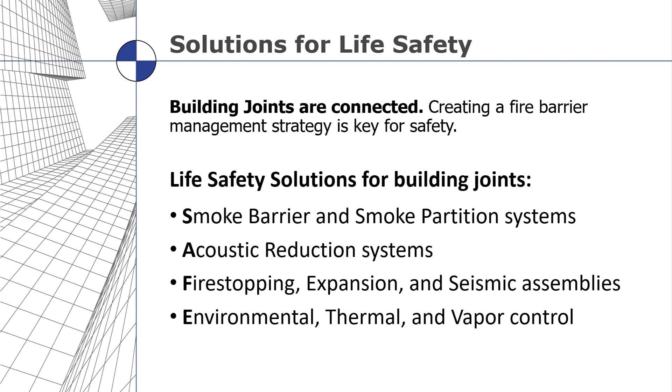Building joints are connected. They create a fire barrier management strategy, and that is key for life safety. So we're going to talk pretty in depth about smoke barriers and smoke partitions, which are a bit different from each other. Acoustic reduction for the transfer of sound from inside a structure and also from outside a structure to the inside. Fire stopping, expansion and seismic assemblies, and then environmental areas like thermal and vapor control.

Contiguous joint and gap barriers happen in all kinds of structures. Buildings of many types are meant to protect us as occupants. They also provide functionality, right? We need to mitigate the harmful things while allowing the comforts and services that these buildings are designed for. All types of buildings happen to have these different kinds of opportunities in them.

Schools, offices, the building on the top left there is Devon Energy Buildings. It's a 60-story building in Oklahoma. There's a vertical seal on the exterior of that structure where there's an expansion joint. And then manufacturing facilities and lots of data centers and things like that.

Warehousing where there's distribution, entertainment facilities, football stadiums, arenas, and civic centers. Transportation, so parking garages or airports. In the top right picture there is a design schematic of what is generally referred to as a Texas wrap, where a parking garage is stored inside a perimeter structure that is made for residential and commercial use. Housing, multifamily housing, dining, restaurants, all types, and then hospitals.

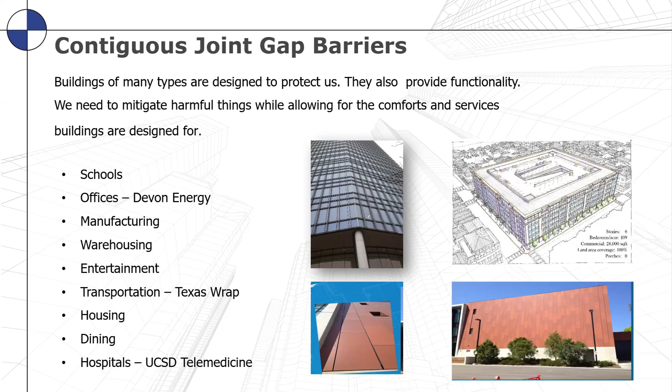The bottom two pictures are of the UC San Diego telemedicine building that has expansion joints all the way around. The right-hand side is a big picture of the elevation of the structure, and the left-hand picture shows where the expansion joint is located. It's pretty well hidden behind the structure, but that's where all the seismic relief happens. So those are just examples of the many types of buildings that we'll be addressing.

Linear joints are designed to allow movement for thermal expansion and contraction, seismic movement, structural loads, and wind sway. Hurricanes move buildings, earthquakes move buildings, hot and cold temperature moves buildings. And when they move, you have to put joints in there to allow for all these different elements that are happening and putting pressure on your structure.

And so when you have an opening in one of those, you need to make sure you have contained that by good measures of smoke control, acoustic transmission, fire resistance, and all the different environmental concerns.

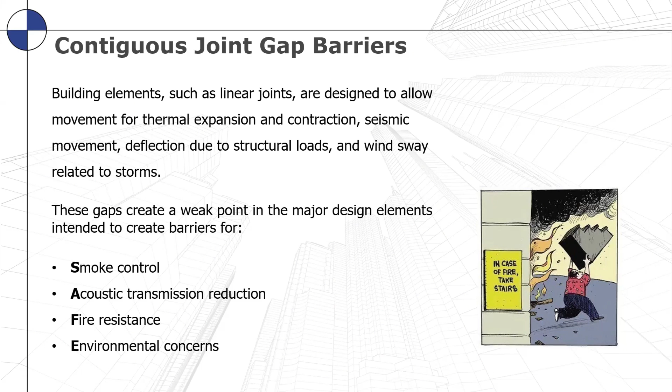Major design elements include fire-rated floors made of concrete or wood, walls made of gypsum or block. There's roofing materials, exterior cladding materials. There are all different types of materials that come together to create an architectural structure.

And so the joints happen in those routinely and are identified by codes and standards as head and bottom of walls. So the top and bottom of where a gypsum or block wall would meet the next floor up above it or down below it. Curtain walls, which are exterior structures usually on high-rise structures. Expansion, seismic, wind, and thermal control movement gaps happen all throughout the structure.

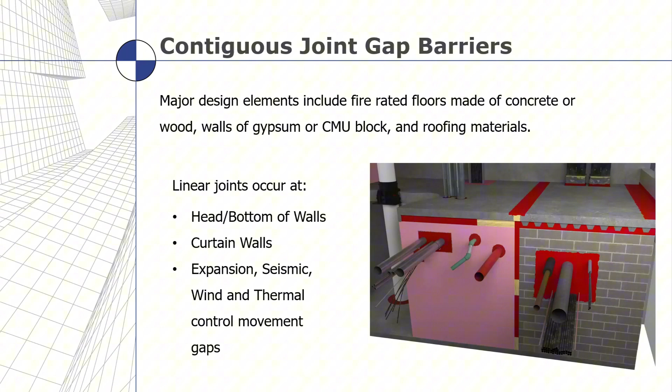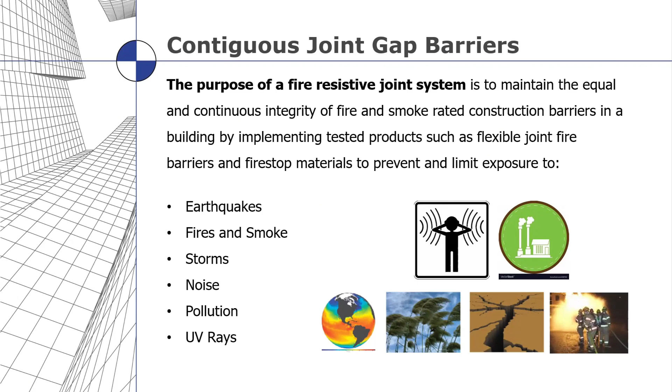So a fire-resistive joint system is required to maintain a continuous integrity of fire and smoke construction barriers in a building by implementing tested products. So that's a key component. You need to have tested products that meet the kinds of criteria that are needed, and you need to be able to incorporate the flexibility, and all of those things need to be tested so that they can reduce the impacts of earthquakes, fires, storms, noise pollution, things of that nature, UV rays, harmful elements on the structure.

So containment, compartmentation is a very, very key concept in management of joint systems. When you design a structure as an architect or engineer, you compartmentalize the structure internally so that you have a way of containing the spread of any kind of issue such as fire or smoke, we'll use in this particular application. And the building on the left is the MGM Grand Hotel Casino in Las Vegas.

It was early 1980s. That structure had some gaps in it that allowed a lot of smoke to migrate throughout the structure. The fire was down at the bottom, but the smoke is what made its way through the structure, and you can see that it just went through the entire structure as it went up. That's been a pretty heavily studied project over the years, but a good contrast to that is a building to the right. This is a chemical manufacturing facility in Yorkshire, England.

And so what you can see is there's a few levels there. There's at least four stories of some glass filled windows there. And you can see up towards the third level, there was a fire that took place, but that fire did not spread beyond that area. What you're looking at right there is a containment. So that sort of L shape that you're seeing is really a big rectangular box that's got firewalls all the way around it.

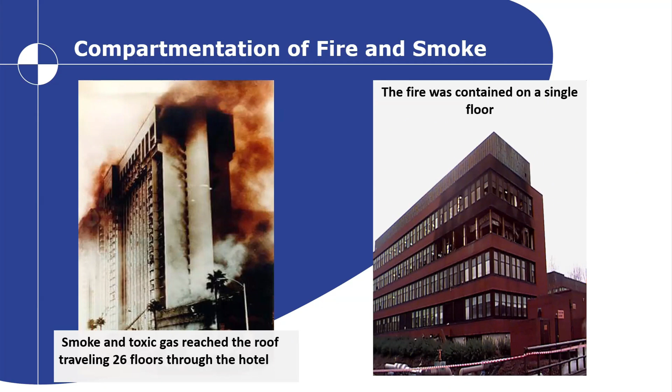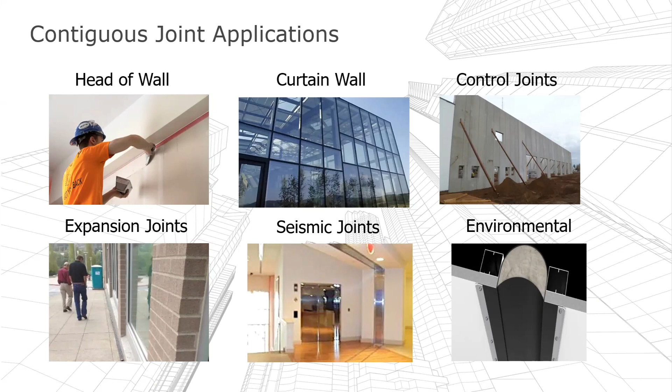So the joints that happen in that compartmentalized area consist of head of wall applications, curtain wall applications, control joints, expansion joints, seismic joints, and environmental protective joints, which would be openings in the exterior of a structure that are designed for movement. And so we'll look at all these in detail as we move through here.

So again, smoke is one of the main items that are very important to be able to contain in a structure. And so lots of surveys have been taking place. This one is John Hall Jr. from the National Fire Protection Association. He did a lot of studies, and he noticed that 75% of casualties that happen in a fire are caused by smoke inhalation. It's not by heat. It's not by structural collapse. It's not by the flames. It's smoke inhalation. So how does that get to people so quickly?

Well, if you think about it, smoke not only gets in your lungs, but it also stops your visibility. And so one of the things that he noticed in there was the speed that smoke travels. Smoke has some speed to it, it's not just lingering around. When you have it in a contained structure, you have different building elements, and the two elements may be side by side, and they have equalized pressure in the building, whether that's done through an HVAC system or whatever.

The volume of air is in equilibrium. When you start introducing a new element in there, it starts taking up volume. And while smoke doesn't seem like it takes up a lot of volume, it really does. And as smoke fills the volume, the pressure changes, and then the smoke wants to move through whatever it can.

So if there's an opening like an expansion joint or a head of wall joint or any kind of gap in the structure, it wants to go through that to the other side to get equalized pressure again. And so it does that. How does it do it? Well, it moves through any opening that it can find, and then how fast does it move? 120 to 420 feet per minute.

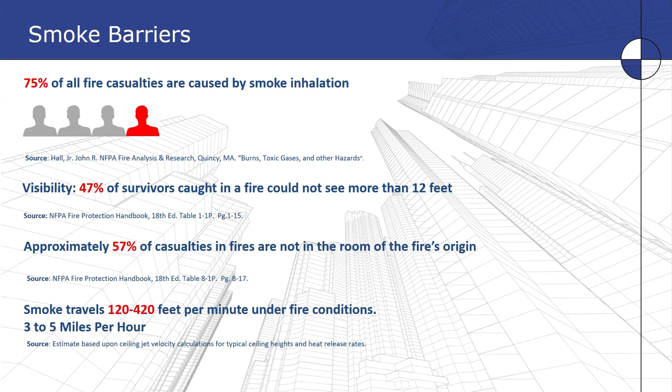But if you pile lots of people in a corridor that's meant for egress or a stairwell, that becomes impractical. And so smoke overtakes a lot of folks. So we want to contain smoke. That's very, very important. So there's a difference in the smoke control systems in a structure. There are smoke barriers and smoke partitions. And the short version is a smoke partition is designed to keep smoke inside a contained area.

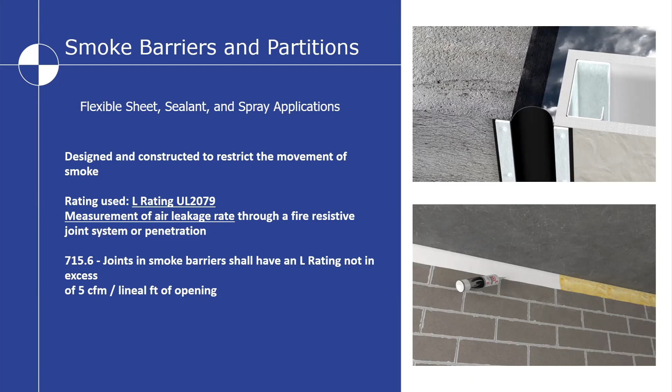A smoke barrier is designed to keep smoke and fire. That word barrier is the key difference. When the word barrier is in there, this construction material is not only meant to stop smoke, but it's also meant to stop heat and flames and things of that nature. And so they are developed in the codes and standards a bit differently.

A smoke barrier through the International Building Code, IBC section 709, addresses a standard, which is a test standard, UL 2079, and there's other standards that are similar. It carries a minimum 1 hour rating on it for fire as well as smoke.

And so IBC 715.6 identifies a section within that UL 2079 standard that is called an L rating, which stands for air leakage, which is also the identifier for smoke. And so it must be less than 5 cubic feet per minute per linear foot. A smoke partition does not require the fire segment or the L rating segment.

It requires a different standard, which is IBC 710, which refers to ASTM E90 as the standard, and it really is just a containment of smoke. So it doesn't have to deal with the fire protective aspects. And so IBC 710.7: joints shall be filled with an approved material to limit the free passage of smoke. So it doesn't have to have quite the criteria of fire and that sort of thing.

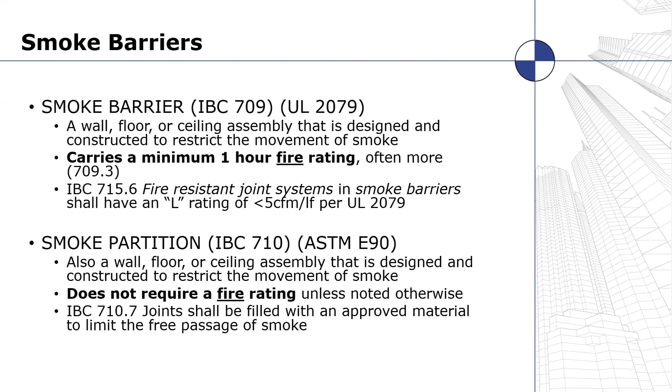One of the areas where you will find joints commonly are at the head of wall and bottom of wall. And so there are different kinds of materials that are used. Some are sealants, some are foam materials, some are tapes. There's a bunch of different kinds of products that can be used in there. And so you have smoke criteria. You also have acoustic barriers. So we're going to move to the next level from smoke to an acoustic barrier, where you have to seal that to keep sound from transferring from one area to the other.

And so just think about this. Say in a hotel, right? You don't want sound transferring from room to room, from elevators or restaurants or cooking areas, transferring into rooms or different areas. Schools, right? You don't want one classroom hearing what the other classroom's talking about so much. You just don't want that kind of sound.

But there are also some health areas that are important to this, and that is HIPAA violations in medical facilities. So you do not want to have two rooms next to each other where one patient in one room can hear the doctor talking to the other patient in the other room, or any type of diagnosis or anything like that. So it's very, very important that you control the passage of sound through structures.

And so there are standards in place. The two standards that are mostly used: the STC rating, which is a sound transmission class rating. It is a measure of the number of decibel drops that you would have with any particular product. And so there's a requirement that says that as a minimum, in most cases, you would want to have from an interior structure, room to room, a decibel drop of 50 decibels from one to the other.

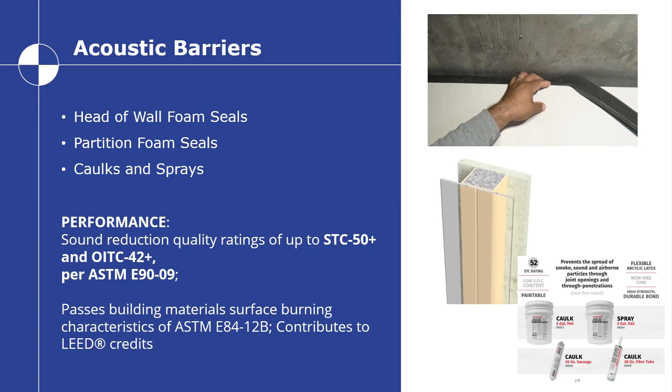So this is an example of the STC ratings, the sound transmission classes. And so what are acceptable levels? If you have a decibel level, when you get up around that 50 mark, you start being able to hear some sounds. They're very loud sounds. At 60, you can faintly hear shouting or hammering. 70 plus would be virtually no sound transmission at all. So if you hit that 50-60 class with your ability to impede sound transfer, then you can take care of some pretty loud noises. Products that are less than that, obviously, too much sound comes through at an unacceptable level.

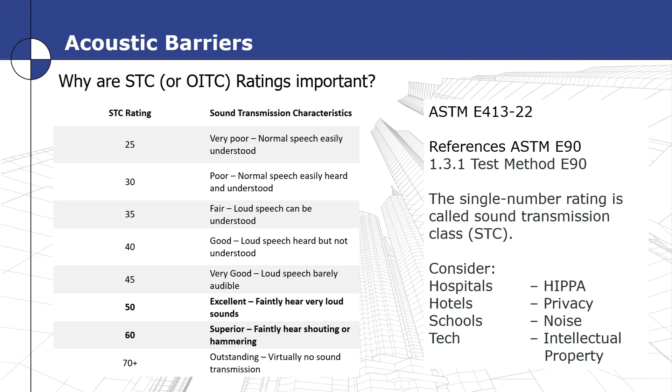So we've talked about smoke, we've talked about acoustic. When we talk about fire barriers, these are areas in the structure that keep the fire from transferring from one segment of the building to another. But when you build these structures, they can't be completely airtight and sealed off totally with the standard barrier materials, which would be the gypsum or the concrete or things of that nature. You really need to put things like sealants or foams or seals or tapes, whatever the approved materials are, to allow for the building movement to happen, but at the same time stopping the fire, smoke, sound from going through those openings.

So you can see in the diagram in the center of the page, there's a stud wall, gypsum wall going up to a corrugated concrete floor decking material. That is designed to allow that top floor level to compress down towards the floor below it and expand back up. That happens in deflection, in building movement and things of that nature. So you have to have some amount of motion that's allowed. So any item that you put in to mitigate that smoke and fire has to have the flexibility to take up that deflection at the same time. And that happens at the top of the wall and at the bottom of the wall as well.

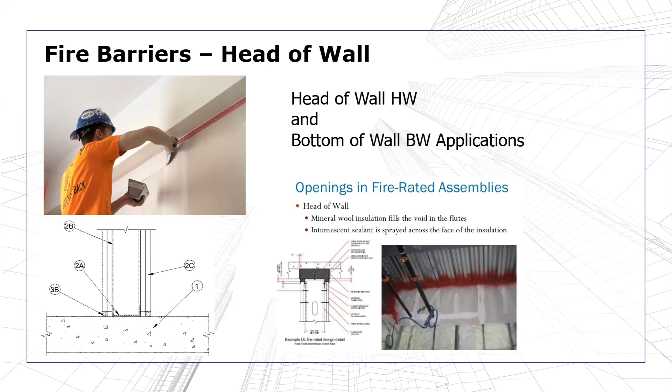So this is an example of the motion. You can see on the left-hand side this design where the stud wall meets the floor above it. And then you can see on the right-hand side where that has been deflected. It's been pushed down by whatever means, whether it's loaded with people or whether there's some motion taking place. It could be earthquake or hurricane or something. If the building's moving, then these elements start being compressed together.

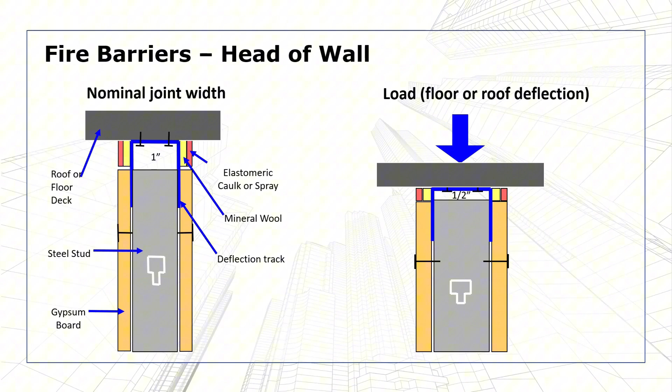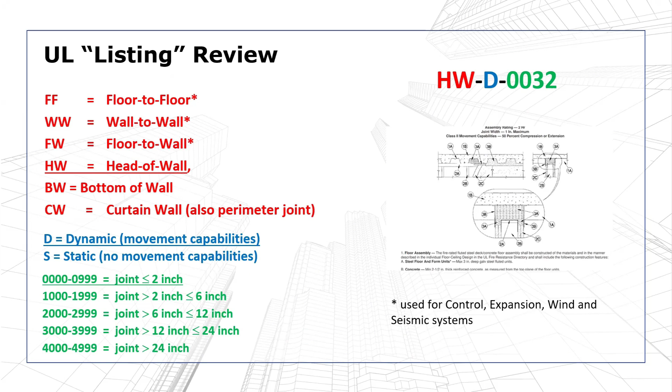So each manufacturer gets whatever number it is that they have in line for the test that they did to an HWD design. There are some measures used in that numbering system to help you identify how big these gaps are. The 0 series is less than 2 inches. The 1000s are 2 to 6 inches. The 2000s are 6 inches, and so on. And the 4000 and higher are very, very large seismic gap openings of 24 inches or greater.

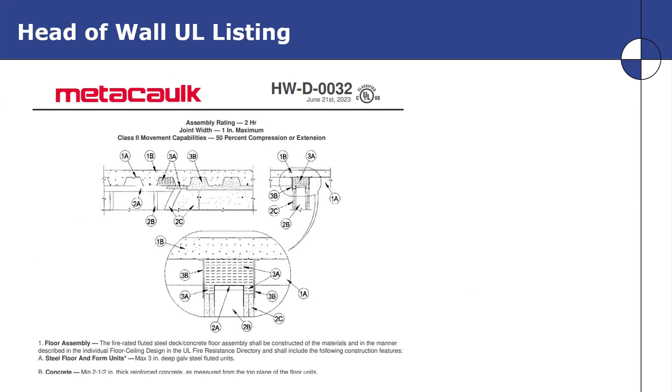That just shows you what the final listing would look like on an underwriter's laboratory listed assembly, which would be the wall and the fire protection materials and all those things together. It gives you a bunch of data pointed out in the schematics that tell you what the floor material is made of, what the fire protective materials are made of, and what the gypsum or other materials are designed for. It gives you all the detail level in that listing.

Curtain walls are the exterior structure. They're attached to the edges of the slab and on the exterior of the structure, going the full height of the building from wherever the curtain wall starts at the lower levels all the way up to the roof line. In between the edge of the curtain wall, which is attached to the edge of the structure, and the concrete that makes up each floor level, is a gap.

That gap is allowed because you need some room for deflection. So if wind blows across the curtain wall, it can deflect in and out. You've got movement, and it can vary from top to bottom, across the width, length, height, and all that. So that gap has to be contained. You cannot just have a gap between the concrete and the curtain wall, because that would allow flames, heat, smoke, and acoustics to transfer through there.

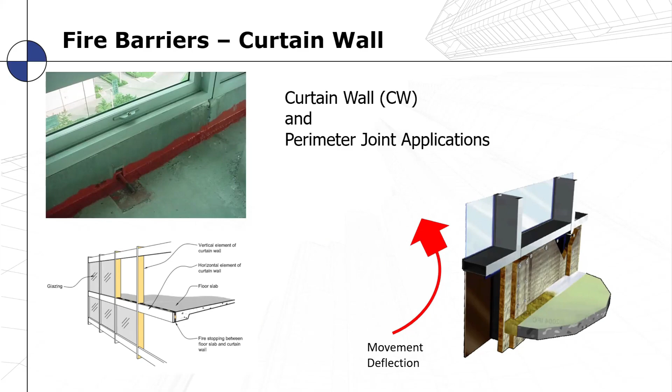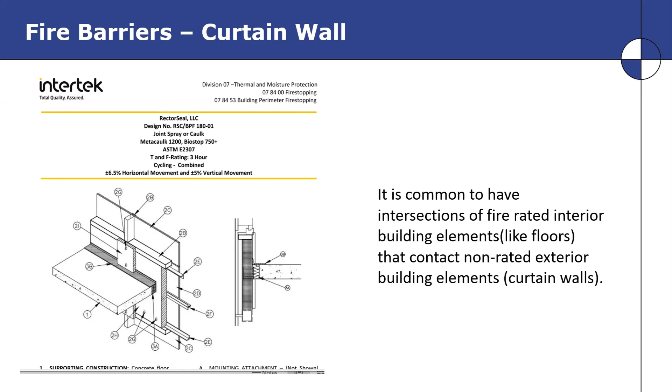One of the things that we see is common intersections that happen where you have these different building elements that meet each other at the same time.

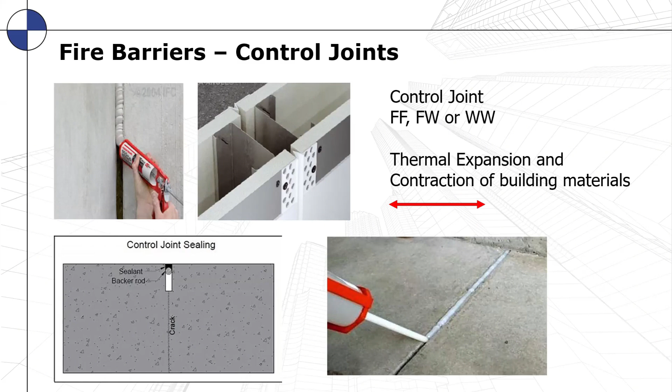We also have control joints in a structure. Control joints are like expansion joints. The difference is an expansion joint is a complete structural separation, whereas a control joint is a gap to control cracking of building materials, like where you would have settling of a building or something like that. These gaps are generally much smaller, but they're still significant, and they can still allow the passage of smoke, fire, flame, sound, and heat. But they typically have very minimal amounts of movement, so these gaps are typically less than an inch wide.

Larger joints that happen in buildings are generally related to seismic and wind motion. So the ability to expand and contract is measured and set up in test standards. These gaps are drawn into the structure in what we would call a nominal joint. So on the architectural drawing, if it says it's a 2-inch gap or a 4-inch gap or 24-inch gap or whatever, it has to open and close a certain amount.

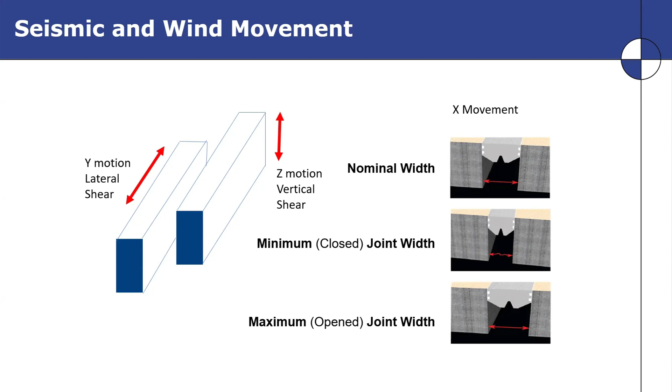So it is not a static element, it is a dynamic element. It moves back and forth. It would close to a minimum size specified, and it would open up to a maximum opening specified, and it returns back to its nominal size. In test standards, that is cycled multiple times to make sure that the building materials can handle that kind of motion on a regular basis rather than just a one-time basis.

If the building starts to move, in the case of high winds or an earthquake or something like that, this allows those concrete slabs, the gypsum walls, and the steel columns to not connect with each other and bang into each other during an event. So the whole stress relief function is shown here in a video for you.

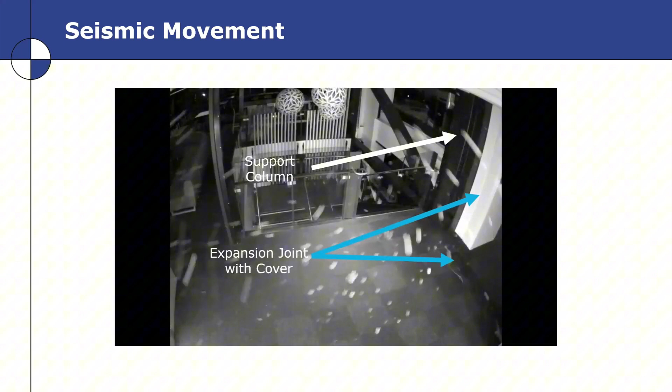So you can start to see the earthquake begin now. You can see the chandeliers moving at the top, and you can see that joint gap opening up. There's an expansion joint cover system in that floor opening, and there are fire-rated elements inside that floor opening and in that vertical column.

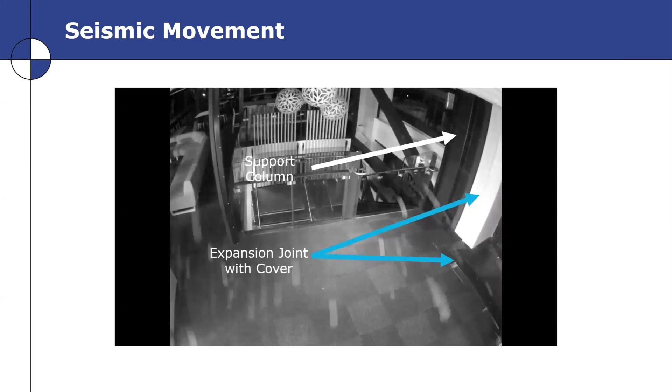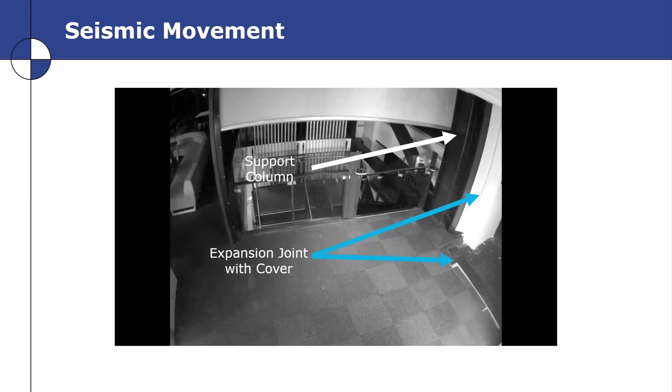If you did not have that gap in place right there, what you would have is a lateral load of that right-hand concrete crashing into those columns. Columns are great at support from the top down, but they're not great at support from a lateral load or impact from the side, which causes columns to buckle. So that stress relief point right there is very important.

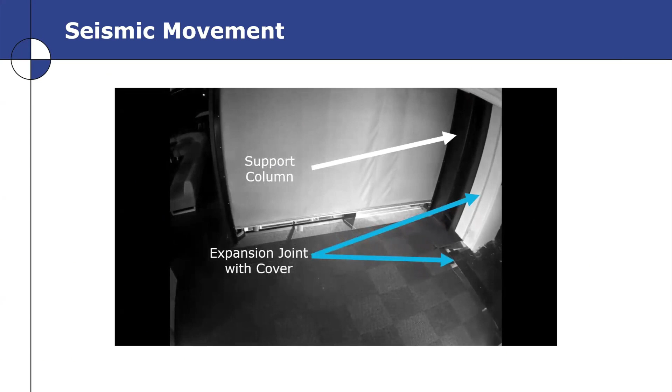Providing that stress relief keeps you structurally sound, and then filling that with a fire resistive material so that you maintain continuity of fire, smoke, and sound allows you to keep the environment of the building intact. That curtain you see in the back, that gray one, happens to be a fire or smoke control system, also sometimes used in the front of elevators. So it's kind of got two things in one in that video there.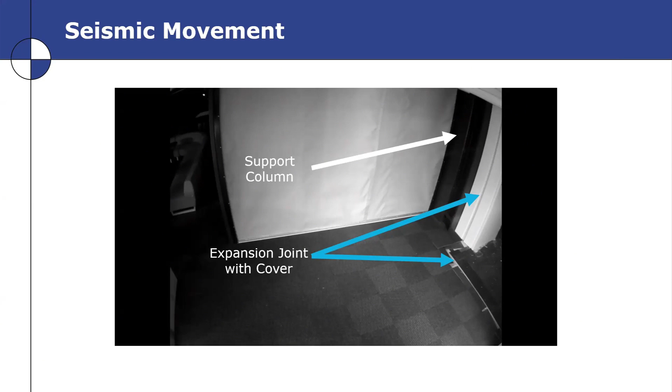So fire barriers for expansion joints have these designations: FF, FW, WW. FF is floor to floor, FW is floor to wall, and WW is wall to wall.

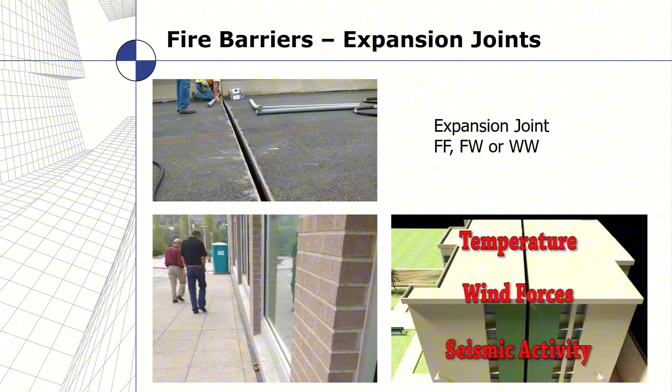The thing you need to understand about expansion joints is they are a complete structural separation from the roof to the ground and from one side of the wall to the other side. They don't always run straight—they can run in different directions, turn 90 degrees, and change directions in those kinds of ways.

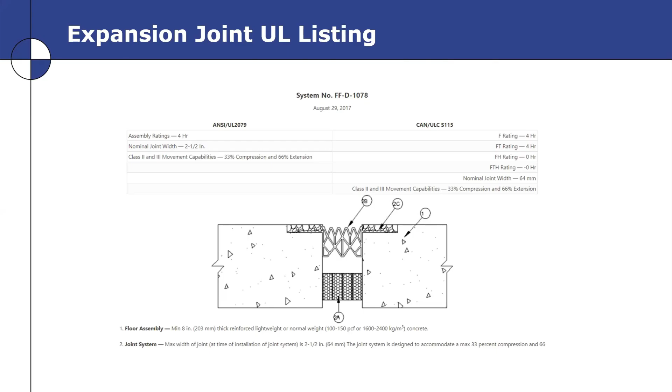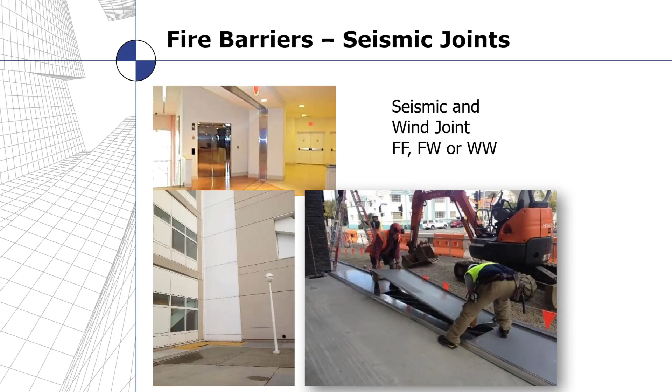This is the police headquarters building in Christchurch, New Zealand. There's a joint that runs around the perimeter of the structure, and you can see two gentlemen installing an expansion joint cover plate in that application.

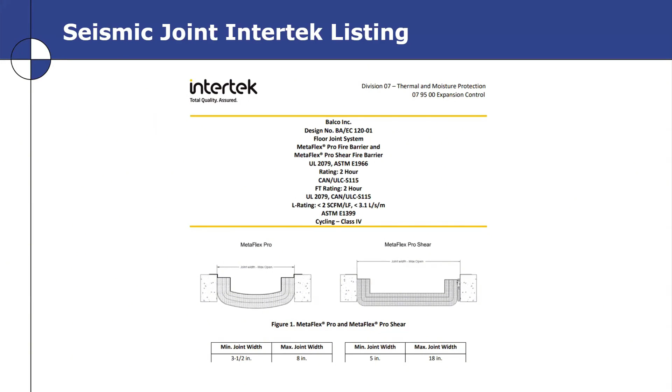Several different companies provide listings. UL are the ones that we've looked at so far, but Intertek Testing Laboratory is also another one that allows for testing of expansion and seismic joint systems.

Now we're going to talk about environmental barriers in expansion joint applications. When you separate this structure internally, you have fire and smoke control systems. When you separate the exterior walls and roof materials on a structure, those are not always fire rated. The building codes don't always require exterior walls to be fire rated. They can be both, but in some cases it really is designed to have a requirement for weather control.

There are designs out there that are made to be flexible and have all the movement. But in addition to all those kinds of things, they're also tested to these standards for air, water, structural, cyclic movement, UV resistance, and thermal values of R13 to R30.

There can be different types. Different systems have different kinds of insulative values. It sort of depends on the material and the thickness that you apply to the structure.

A lot of times these systems are a belt and suspenders kind of approach. So you may have an expansion joint on the exterior of a structure, or a sealant joint like you see in the top left image. You have a brick facade where you've got a sealant joint with some backer rod on top, and then down inside there you've got some type of system in place that might look like the system at the bottom of the page, where instead of just doing more sealant, you may have a system that is robustly designed to handle all this air and water. They're pressurized and things of that nature to keep the outside out and the inside in.

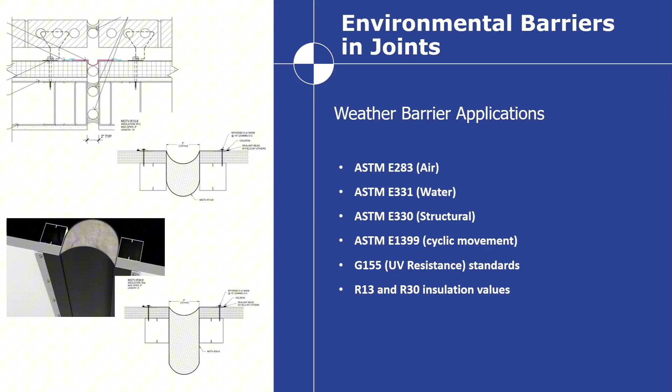There are a lot of different ways that these are applied to the structure. Some are just thin sheets that are stopping smoke. Some have got insulative values. Some have got metal exteriors, and some have got elastomeric exteriors.

An elastomeric exterior would be something that would prevent UV and things of that nature from getting into a structure. It would stop rain, weather, and that sort of thing.

Metal covers are often used on either very large joints or joint applications on exteriors of structures where you may have a lot of metal cladding, or you may have a lot of debris anticipated.

Let's say you've got hurricane force winds in an area that's got a lot of trees and shrubs and other things like that around that would be blowing in the air, or a tornado or something of that nature. So these add some extra structural elements to the joint areas in the structure.

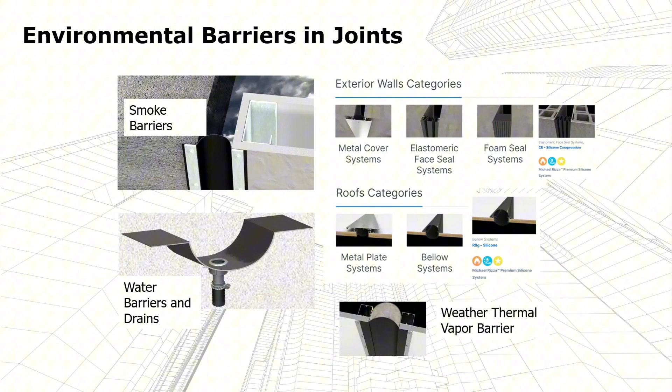So when these systems meet up, occasionally you will have an expansion joint in a building that meets a curtain wall or a head of wall, or all these different types of things. They come together, and so they may be tested independently. They may have different building codes, but inevitably they intersect. So what do you do when you have those kinds of applications?

You have to look at solutions that can be provided that provide continuity of the structure.

What you're seeing on the left is Nashville airport, and there's an expansion joint running underneath those padded benches that you see, and they run into the curtain wall, and they wrapped it with a column cover. In that column cover, there's an expansion joint that runs up the vertical and then across the ceiling. You can see it in the ceiling component there as well.

But these are fire rated, and so a fire barrier is placed in the joint in the floor, and then also a curtain wall fire stop material is added to the curtain wall. Inevitably, right there where those tee into each other, you need a solution that allows for both of those to function properly in that application. It's important if you can have a single source that allows you to do both of these things.

Because the expansion joint material meets the curtain wall material, it's very beneficial if the manufacturer has the ability to analyze both materials to determine the compatibility between the two, so that you can get a system that has the best chance of meeting all of the fire, smoke, acoustic, and environmental properties all in that same location.

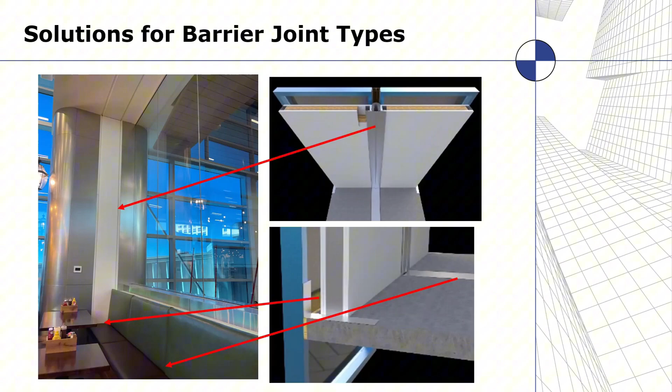So those are notoriously complex applications where you have curtain walls that meet expansion joint applications. This is the before; this is you, got the after picture, the finished look, and now this is what it looked like making its way there.

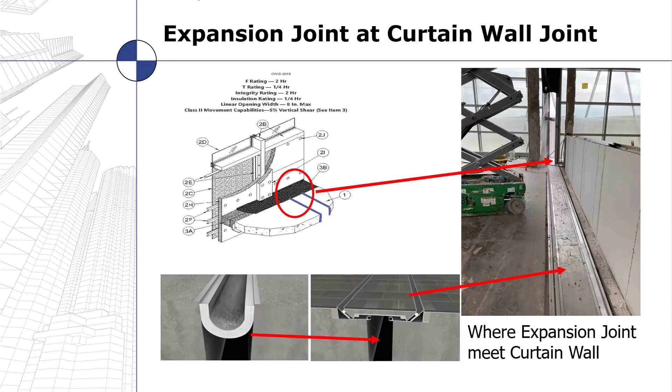That same area where you had those benches, that silver plate running across the floor is an expansion joint cover system that has a fire protective material below it, a fire barrier expansion joint material. Where it meets that exterior wall, you can see where the two join each other, and you would have the perimeter joint or curtain wall fire stopping material. Those two would butt together, and a solution is provided at that intersection so that you have continuity. You don't want gaps and openings. The sizes and makeup of the two different materials can be completely different from each other, so it's good to have a solution that allows you to tie all those things together.

Something else that happens in a structure is there may be requirements for breaching a fire or smoke wall. So if you cut an opening into one of those, you need a proper method for putting that back together so it meets the standards of fire stopping and the different kinds of requirements made for that particular partition, whether it's a smoke partition or a smoke barrier. You need to be able to put that together with a solution that allows for that change in direction.

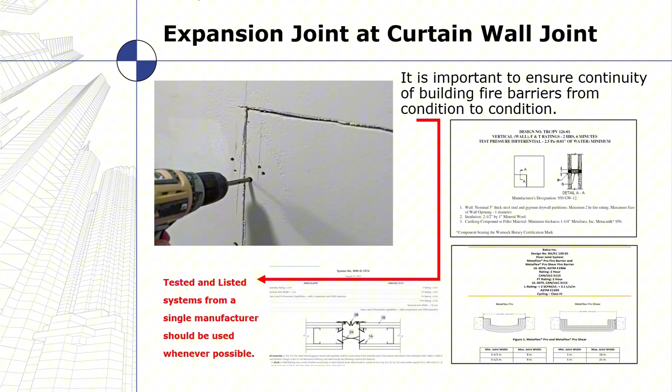When you're looking at codes and inspection criteria, there are some specific areas. The International Building Code is the one we refer to most often. International Fire Code and NFPA, the National Fire Protection Association, all have related codes. Most of those are synchronized so the language in one meets the language in the other, and there are lots of committees that do those kinds of coordinations. Same thing with ASTM, American Society of Testing Materials, and UL, Underwriters Laboratories. They also have committees that synchronize the information so that when the criteria is set and the testing is complete, the two say the same thing, so you don't have conflicts in the structure.

For the most part, they do quite well at pulling these together so you have a very clear path as to what to do in the field. These fire resistive joint systems of all types, whether it's a head of wall, an expansion joint, or a control joint, are tested to these standards. The building code 715.3 references ASTM E1966 or UL 2079. Those are test standards; the code references the standards, and the standards tell you what you're supposed to do.

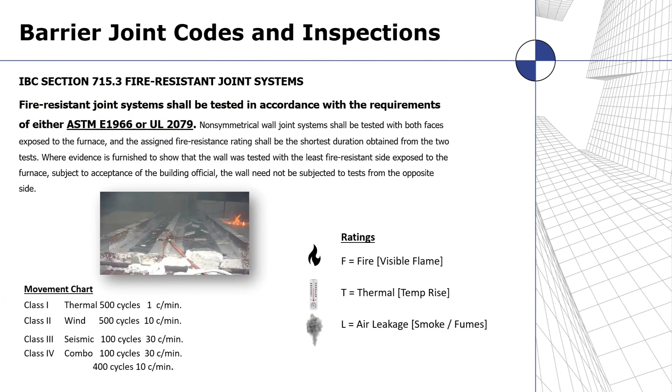And then there's some combinations that can be done so that instead of testing all three individually, if your building has all three criteria, there's a class 4 that is a combination of 100 cycles at 30 cycles a minute and 400 cycles at 10 cycles a minute. And then they do the seismic.

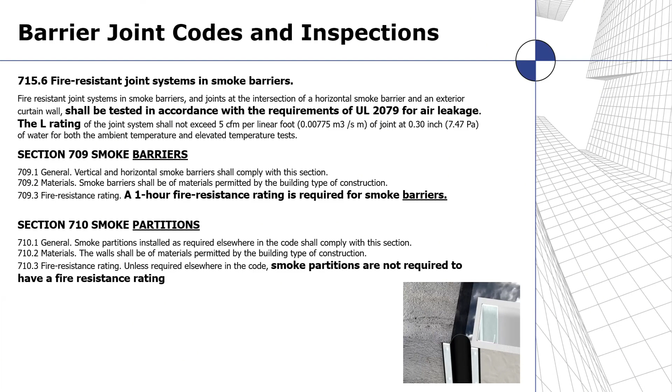So fire-resistive joint systems in smoke barriers - smoke barriers obviously require the fire rating, so they're subject to the same types of flame and heat testing, and the L rating for smoke passage. The smoke partitions are only designed to stop smoke passage.

So we use a CSI master format. The head of wall and bottom wall are in the 078-400 section, which is the fire stopping section. Curtain wall and perimeter joints are also in that 078-400 section. Control joints can be either in the 079-200 section or in the fire stop section, 078-400, so it can be listed in either one. Expansion and seismic joints are in the 079-500 series.

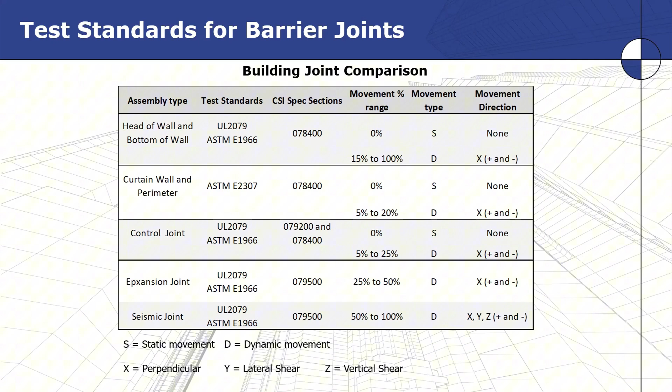You can see that the movement range generally varies quite a lot between the different kinds of systems. Head of wall and bottom of wall can be anywhere from 0% to 15% to 100% movement. Curtain walls and perimeters are generally limited to only about 5 to maybe 20% movement. Control joints may be up to 25% movement. Expansion and seismic joints are commonly 50% and even up to 100% motion, and they can have multiple direction motion.

So what do you do when you have something in your structure that is non-conforming and there are no test standards to meet that? Engineering judgments are usually the go-to method. An engineering judgment is a document where either a laboratory, a professional engineer, or a manufacturer that has tested listed systems can write a document that interpolates or extrapolates from other similar data, to come up with a conclusion stating the best practice for an application that is non-conforming to any other existing solution. This is what we believe will work in your structure.

And if you wanted a test, you would probably have to go through a path that can be quite slow and expensive, to produce a full fire rated tested specimen for your unique condition. But this happens a lot in structures, and there are similar enough applications. Generally speaking, most manufacturers that produce fire stop materials or expansion joint materials do hundreds or even thousands of these a year.

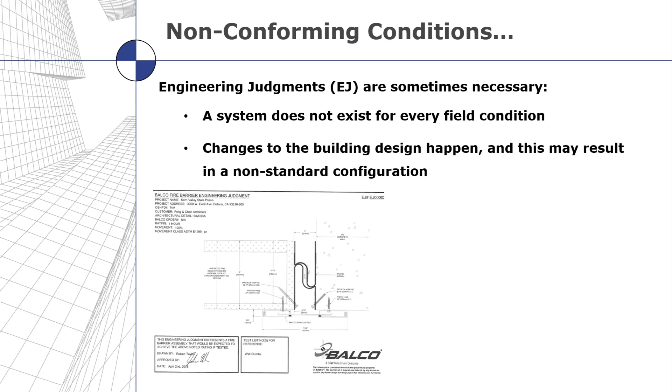But there are governing bodies out there that help us make sure we do a very good job of this. Not everybody is qualified to write an engineering judgment, so there are groups that have classes and certifications in place to ensure that people writing engineering judgments are qualified. You don't want just some person with a vested interest in getting your project complete writing up something that may or may not be valid. That's why we have companies like UL and others with programs that take you through a rigorous process - you have to take a test and show competency in this area to be writing these, and there are guidelines that are set.

The International Firestop Council has a published set of guidelines that state very clearly, if you do an engineering judgment, it should follow this kind of format. It should list the kinds of materials that are used. It should list the test standards that are being used. It should list examples of listings that are similar that can be referenced to create some sort of credibility in the idea that we want to apply an engineering judgment to an application.

So there are paths to get there, but it is always best practice, and it is in the International Firestop Council's guidelines, that if there is a tested listed system that can be used, that should be used first. Only if you've exhausted all options and there are no other listings related to the condition you have in your structure, then you can use an engineering judgment. That ensures that you have done everything you can to make sure you've identified and qualified your condition.

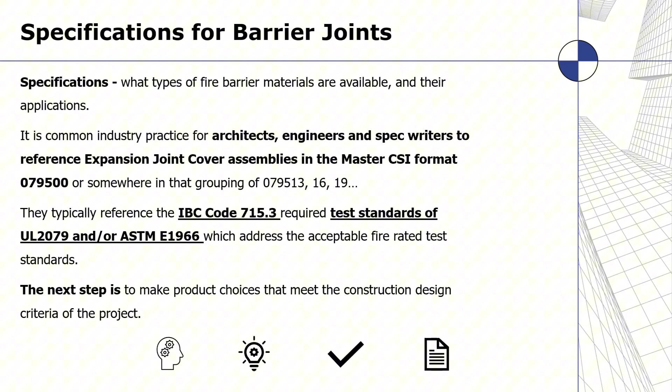So architects, engineers, other folks, spec writing companies, they write these CSI MasterFormat specifications so that they can reference the different kinds of building codes and test standards, and also other things like material compatibility and all those sorts of things. And so they pull all that together, and then they start making product choices that they can use to make sure that they create this continuous barrier that is fire rated, acoustically rated, smoke rated, and has environmental properties.

So if you have those all tied together and you have a nice continuous segment, then your chances of having a safe solution are greatly increased, so that you don't have breaches between the different kinds of materials where you might have a curtain wall meeting an expansion joint meeting a head of wall or bottom of wall, things of that nature. And then if your codes and standards don't address the joinery, then you've got some issues where you're going to have to figure out what you do when you have those challenges in place.

So it's best if you can go to a source that allows you to determine and navigate those kinds of things. And so if you have a manufacturer that can do all those things, then they can warrant that whole joinery, which provides a solution and gives some peace of mind to the ownership and to anybody that would be an authority having jurisdiction in that application.